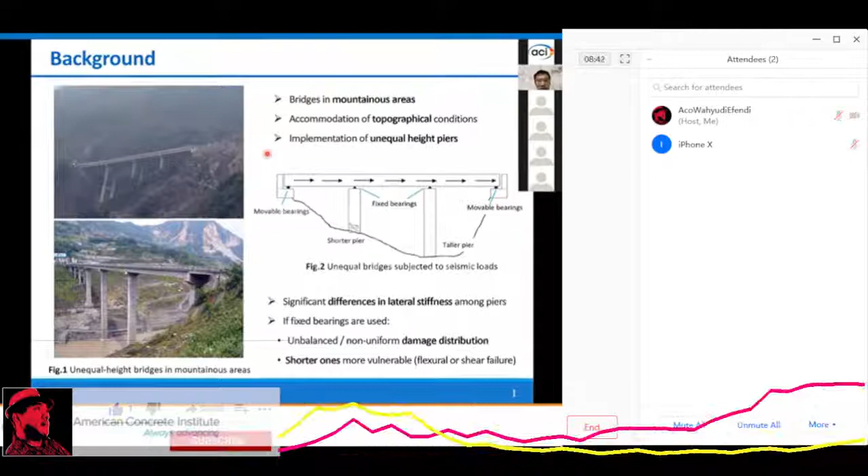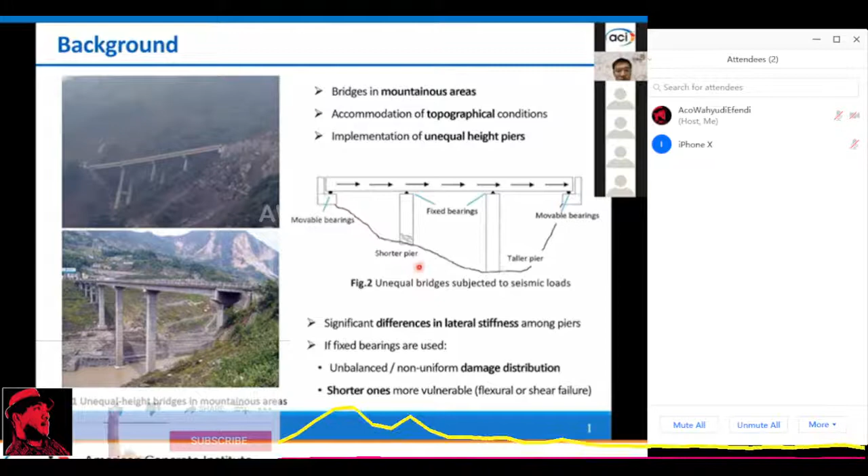As we can see from these two pictures, because of the unequal height, there usually exists a significant difference in the lateral stiffness among different piers. If fixed bearings are used at the unequal piers, the pier-to-pier damage distribution, when subjected to a strong earthquake event, would be non-uniform or unbalanced, where it is clear to see that the shorter piers will become more vulnerable to shear or flexural failure than the taller ones.

So AASHTO seismic design guidelines specify the design concept of balanced stiffness among different piers in a bridge to avoid any significant irregular seismic responses of the bridge. For example, the effective lateral stiffness ratio between any two piers within a bridge shall be no less than 0.5, and for two adjacent piers, it shall be no less than 0.75. The guidelines also recommend some possible methods for adjusting the relative stiffness among the unequal piers.

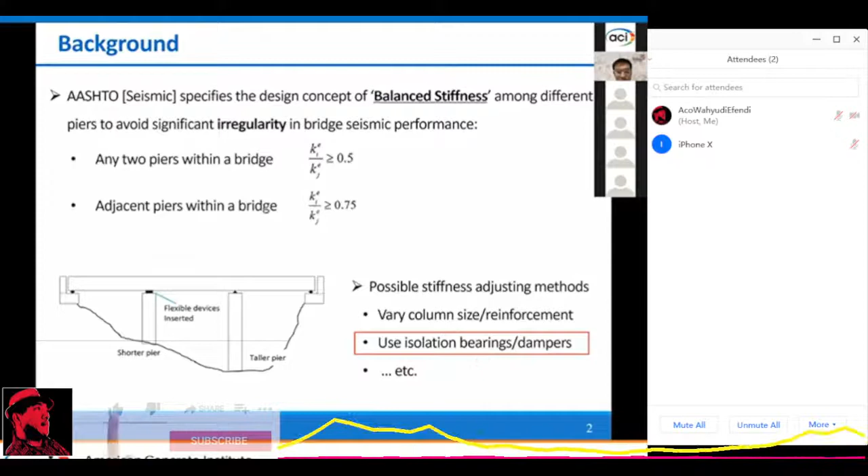For example, we can change the sizes or the reinforcement ratio of the pier columns, or we can use flexible devices like isolation bearings or dampers at the shorter piers. Among all the stiffness adjusting measures, the one using flexible isolation devices would be very desirable, which could be used as a seismic retrofit option for such unequal height bridges.

Common laminated rubber bearings can be adopted, but it should be noted that it is very difficult to have any desirable lateral stiffness through rubber bearings, since such bearings should also be used as vertical load supporting members, and the determination of their properties should also depend on the vertical load, not only the lateral load.

Considering this, some other flexible dampers like the steel plate dampers can be used. These dampers work only in the horizontal directions with little effect on the vertical resistance, and thus their strength and stiffness can be designed as we want.

So in addition to that, what if the emerging SMA dampers are used for such irregular bridges? In this study, we are going to investigate the retrofit effectiveness of SMA dampers for the unequal height bridges.

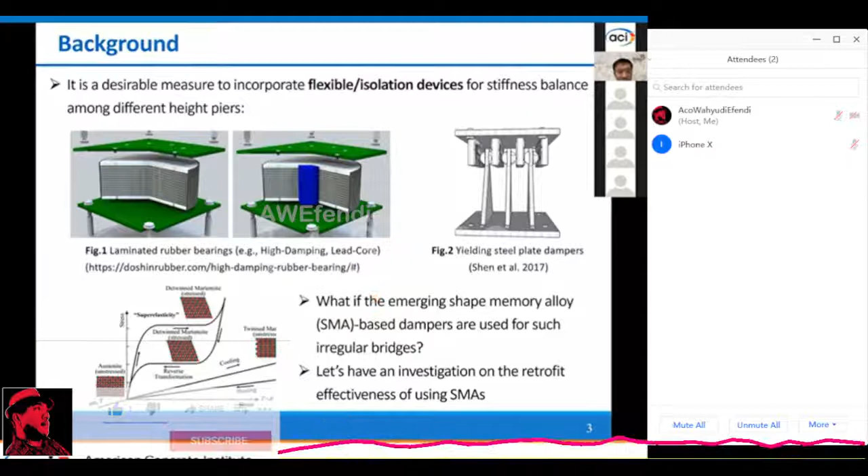In the second part, the details and the finite element modeling of the prototype bridge will be described. Here, in the current study, a three-span continuous RC bridge was selected for study.

The span length is uniform at 25 meters, but the height of these two piers, P1 and P2, varies, which are 6 meters and 10 meters respectively. For this unretrofitted bridge, fixed bearings are used at piers, and at end abutments, sliding bearings are used.

The finite element model of the whole bridge was established using OpenSees, as we can see in figure 2. In this study, we selected three retrofit devices: the rubber bearings, steel plate dampers, and SMA-based cable dampers, implemented at the shorter P1 pier, and compared their relative retrofit effectiveness. These are the analytical models of different retrofit devices.

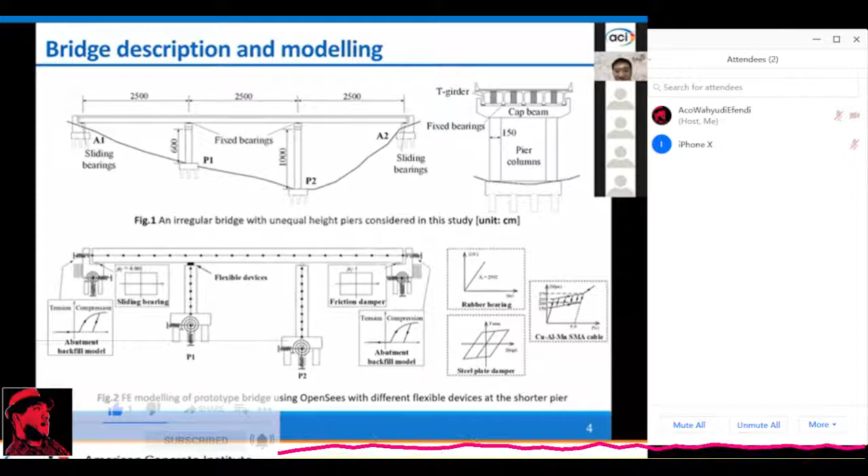In the third part, the design of the SMA dampers for mitigating the seismic irregularity of unequal height bridges will be presented.

Therefore, to fill such big gaps between these unequal height piers, some retrofit design objectives are proposed when designing the SMA dampers.

First, we need to increase the deformation capacity at the shorter piers. Also, uniform damage between the shorter and the taller piers should be maintained following an earthquake. And most importantly, the use of SMA dampers should make the bridge system have a sufficient recentering capacity.

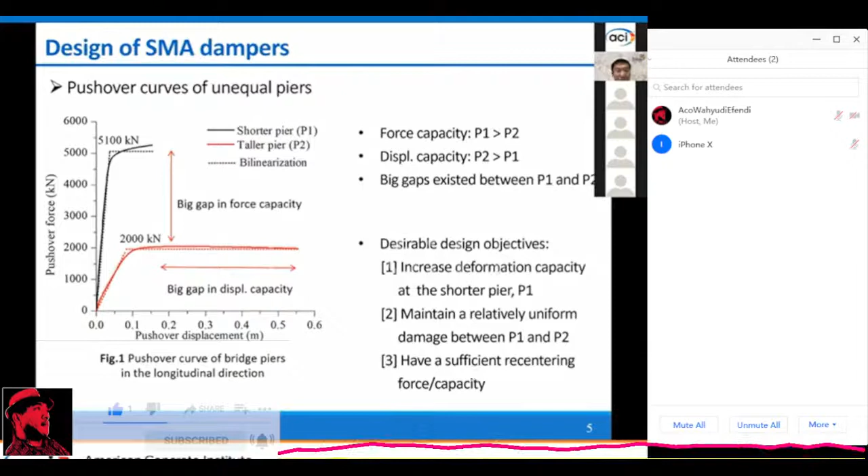So based on the proposed design objectives, the determination method of the required strength of SMA dampers was given. It should be noted that the implemented SMA dampers are in series with the shorter pier, but in parallel with the taller pier. The strength of the SMA dampers should not only avoid the premature failure of the shorter pier, but also ensure a restoring force for recentering the taller pier.

As shown in this figure, it is desirable that the flag-shaped curve of the SMA dampers should locate just between the pushover curves of the shorter and the taller piers. The austenite-to-martensite force should be smaller than the force capacity of the shorter piers, and at the same time, the martensite-to-austenite force should be larger than the force of the taller piers.

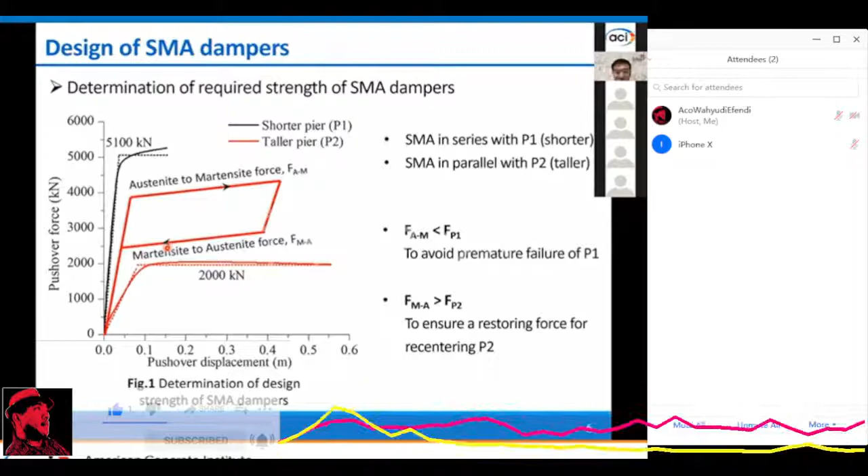In this study, we use SMA dampers with SMA cables implemented at the shorter piers. This is the stress-strain relationship curve of a typical SMA. According to the design objectives, the SMA strengths can be determined accordingly. To have a fair comparison, the steel dampers are also designed with the same force capacity as the SMAs. Besides, the rubber bearings are designed based on the vertical load requirements.

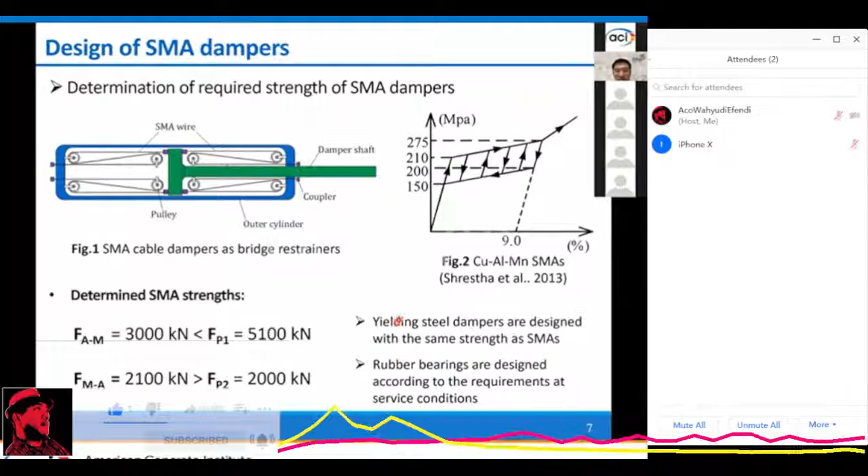In this part, we will conduct the IDA-based seismic fragility analysis. This is a set of selected real earthquake ground motions comprising 160 waves. We chose PGV as the intensity measure for scaling these ground motions. For each ground motion, the PGV was scaled from 10 to 200 at an interval of 10.

At each scaling, we conducted 160 nonlinear time history analyses with the selected ground motions. For each bridge case, there were a total of 3,200 analyses to be carried out in the longitudinal direction of the bridge.

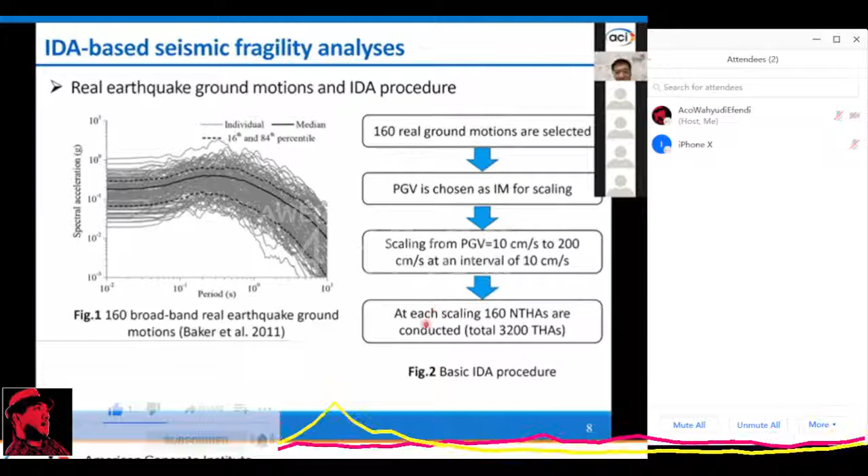After obtaining the 160 IDA curves, we can calculate the probabilities of damage for the bridge at a given intensity measure. In this equation, the lowercase n is the number of ground motions with peak responses exceeding a given damage state. The uppercase N denotes the total number of ground motions, which here is 160. After plotting all the fragility points, the fragility curves can be generated.

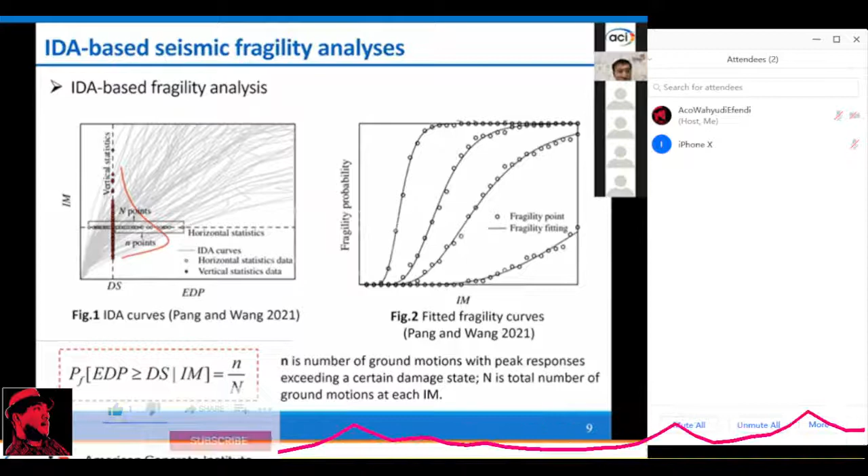The comparison of the retrofit effectiveness among different measures will be given with the fragility analysis results as shown in this part.

These are the fragility curves in terms of maximum pier displacement as a demand parameter. The damage limit states of pier yielding and failure were selected for illustration. As expected, without any retrofit measures, the shorter pier, P1, is much more vulnerable to yielding or failure than the taller piers. After retrofitting with these measures, including the SMA dampers, the fragility difference between the unequal piers could be effectively reduced, achieving a relatively balanced distribution of seismic damage.

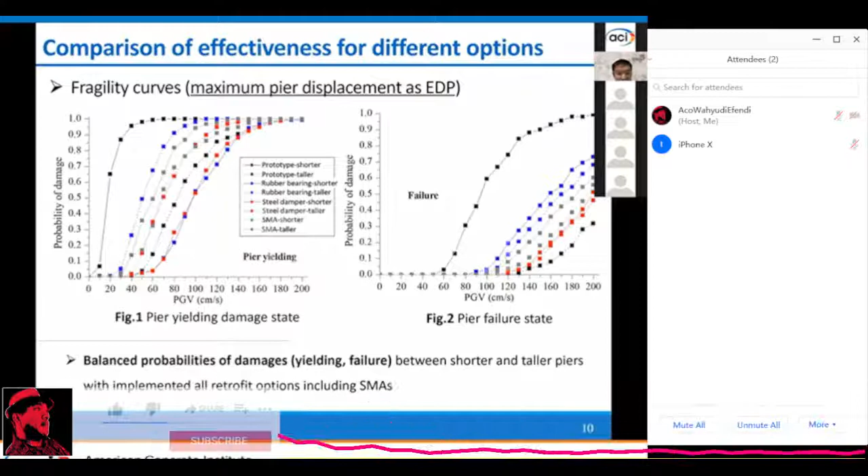In addition, if we use the residual girder displacement as a demand parameter and investigate the relative fragilities of different bridge cases, it can be seen that properly designed SMA dampers could effectively reduce the residual deformation of the bridge system. In terms of residual deformation-based fragilities, the SMA dampers show more effectiveness than the other two options, including the rubber bearings and the steel plate dampers.

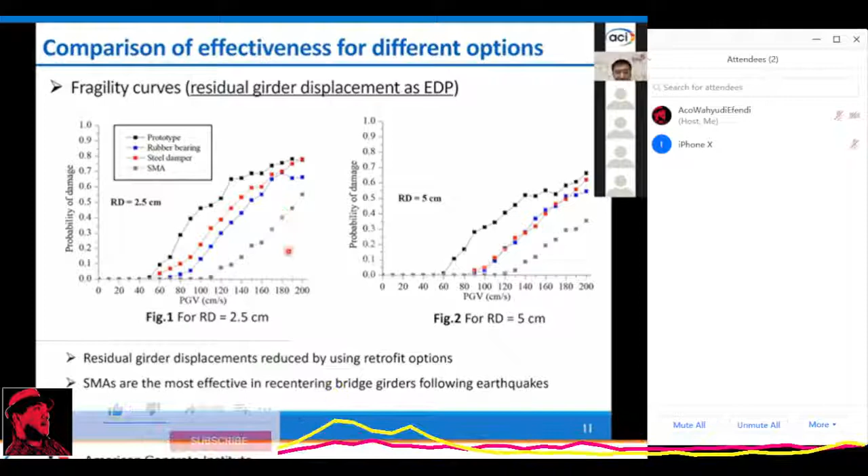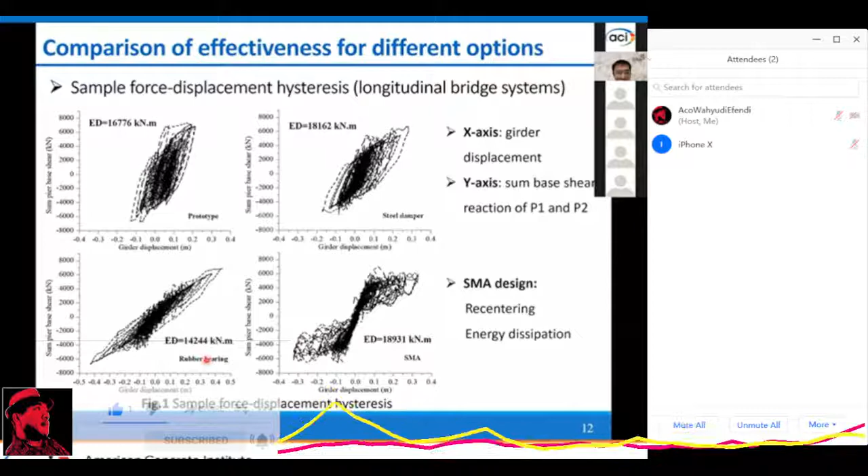Here come the conclusions. Based on the study results, the following conclusions can be reached. First, the unequal piers may show significant gaps in stiffness, strength, and deformation capacities, which is why irregular seismic responses are generated. Secondly, flexible devices can well adjust the stiffness and deformation between the unequal piers if properly designed, and can help achieve a uniform or balanced damage distribution among different piers.

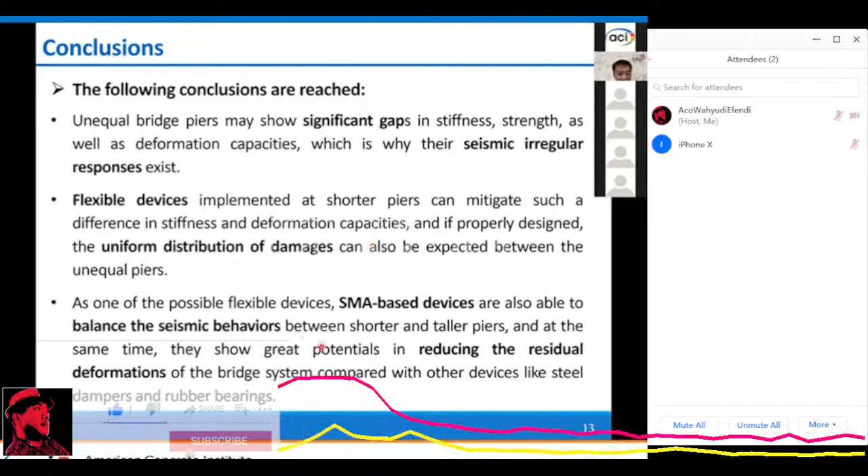SMA dampers, as one kind of possible flexible device, can also balance the seismic responses between the shorter and taller piers. At the same time, they show great effectiveness in reducing the residual deformations of the whole bridge system compared with other devices like steel dampers or rubber bearings.

Okay, this is all my presentation. Thank you so much for your listening.

Thanks. Thank you, Dr. Jiang, for your nice presentation. I see no questions, so I have one quick question for you since there's time for one question.

Why did you choose PGV as your intensity measure for developing the fragility curve? We actually tried many intensity measures, and we found that PGV shows a very good fit in characterizing the PSDM, the demand model, in creating the demand model, better than other IMs like PGA or other options. That's why we chose PGV as the intensity measure in our study. Maybe for other cases it will be different, but in our case, PGV is the best, I think.

Okay, thank you. Thank you. So thank you, Dr. Xiang.